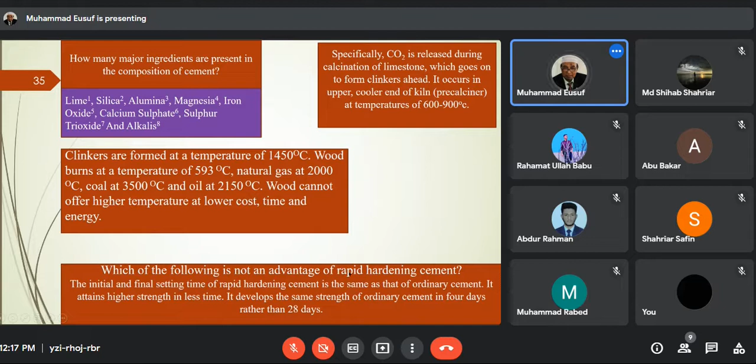This is the composition, and this one is the tricalcium silicate. Tricalcium silicate is one of the Portland cement compounds, its abbreviation C3S. How can we calculate the amount of C3S? 50.7. Then C2S, similarly with this formula, is 22.5. Then C3A, tricalcium aluminate, is 8.6. Then this one, tetracalcium aluminoferrite, is this.

This is a number. This number is the formula, and this value you get from here. This is the free lime. Okay. And properties of cement, again, most important to know. This is the cement properties. Okay, physical properties, chemical properties.

For this class examination, we may ask you the question: what are the main compounds of Portland cement, and how can we calculate this? If this is given, no need to memorize. In the question this equation is given, but this one is not given. So remember this one at least. Okay. And this is important.

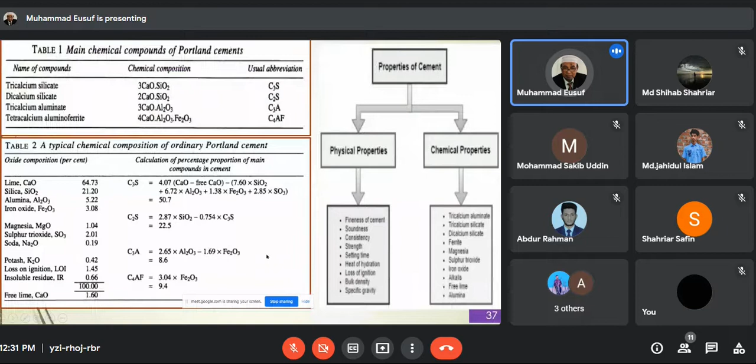Actually, these properties are very general. And this composition is Portland cement. Actually, all are Portland cement. Historically, we said Portland cement, right? Different types of Portland cement are the types of cement. This Portland cement is used in our country, and in construction work we use Portland cement. Other types of cement are very seldom used in our country.

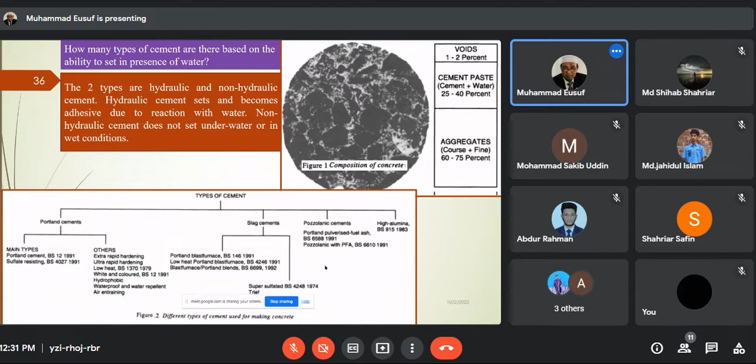These are the main properties of different cement, right? So no need to highly memorize. Just know it. Once you need it, check with this reference. Most important part now: cement is one of the most important ingredients of concrete preparation. The function of cement is to bind all other ingredients and combine them together.

Without water, cement cannot work. Once cement reacts with water, it gains strength for binding, and that binding means adhesive characteristic. There are two types of characteristics.

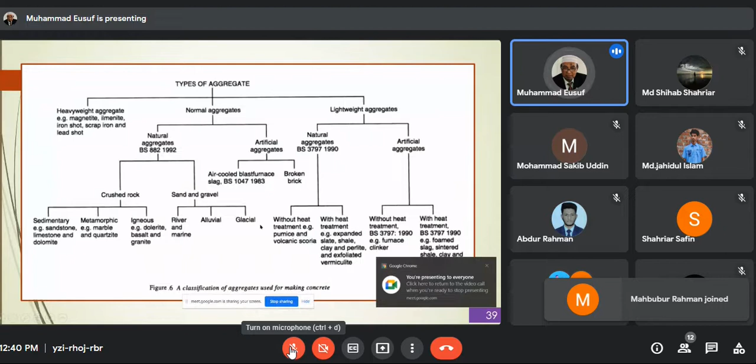La ilaha illallah Muhammad Rasul. Ashhadu anna Muhammad Rasulullah. La hawla wa la quwwata illa billah.

two seasons we cannot work in our country. It is called lean season. Lean, spelling L-E-A-N, lean season of Bangladesh: summer and rainy. This time we make plans, programs, all kinds of managerial jobs. Then we start our work just at the end of the autumn or beginning of the late autumn. So this season we work fully.

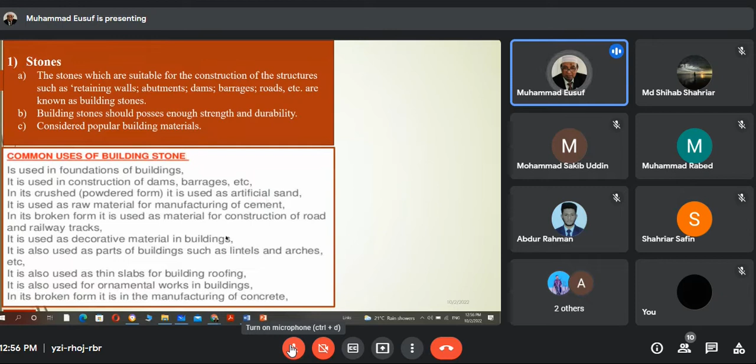Building stone should possess enough strength and durability because it is natural. Enough strength and very durable, long time. It is considered a popular building material. Stone is very popular nowadays in building materials. From the stone we make tiles: floor tiles, wall tiles, toilet tiles. Common uses of building stone. Very carefully study this; this type of question comes in the exam, right? Common uses. You read it, I hope you can understand it.

Okay, now look at hardness. Hardness of stone: qualities and resistance to cutting and resistance to abrasion, scratching. Used in roads and railway tracks. Okay, railway tracks. We use the stone in the railway tracks; its name is ballast. Hardness tests are conducted in the laboratories.

Okay, then durability. This is the ability of stone to resist the atmospheric and other external effects. It depends on the chemical composition and physical structure. Physical structure means what the outlook is, resistance to weathering effects. Weathering means heat, humidity, and wind, and the place where it is used. Stone which contains silicates will be durable. Then those stones which contain a calcareous substance.

Porosity and absorption. Stone can hold water in two ways, either through porosity or absorption. For building purposes, the better stones are those which are less porous because they will absorb less moisture. Porous stones are damaged easily. Porous, sidrojukta, right? Perforated stones are damaged easily. Decomposition: gases and acid in rainwater, acid rain.

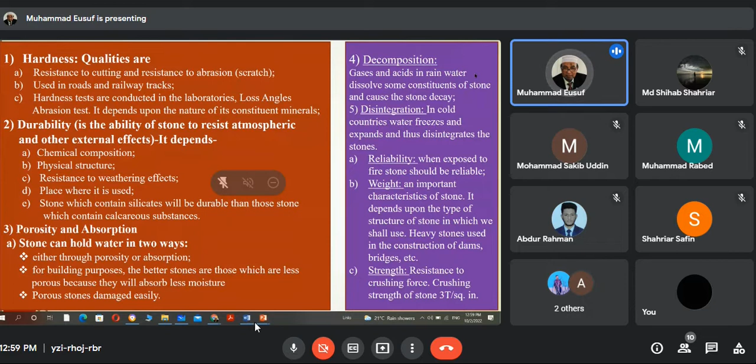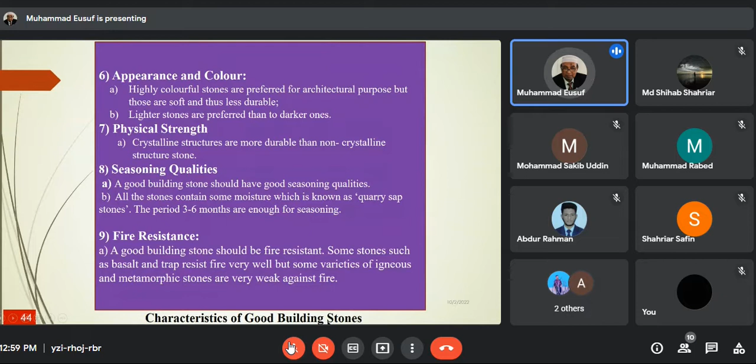And how can we ensure that? Ensure the acid rain: look at the roof of the house, especially a tin shed house. Then reliability, weight and strength, appearance and color, physical strength, seasoning qualities, fire resistance. These are all characteristics of good building stones. Any question you can ask me, or we proceed?

Okay. Stone masonry, like brick masonry. As coarse aggregate in CC and RCC. CC means cement concrete. RCC means reinforced cement concrete. Crushed form of rock is used as roofing material in the form of slates. We use the stone as roofing materials. How can we use the stone as roofing materials? Answer: we make it in slate form, as a flag or thin slab for pavement.

Pave means road surface; pavement, road surface. And wall surface is a vertical surface. Pavement is road. As soling materials in the construction of highways and runways. Do you know the difference between highways and runways? Highway is a road, you know it. Runway is in the airport.

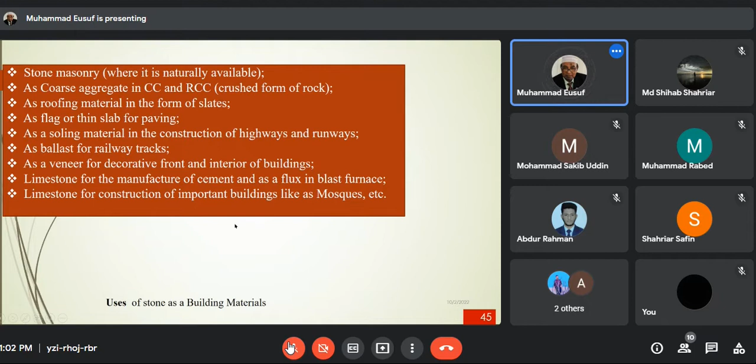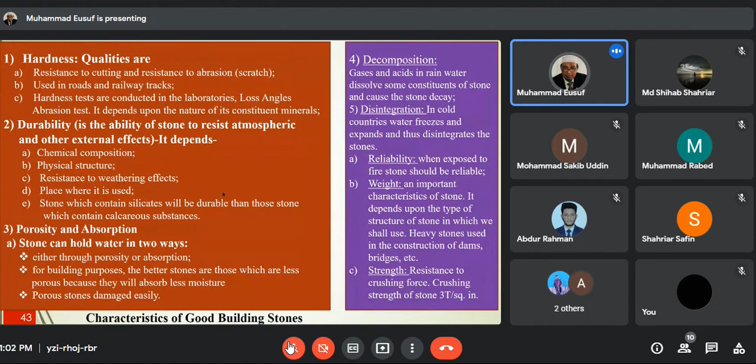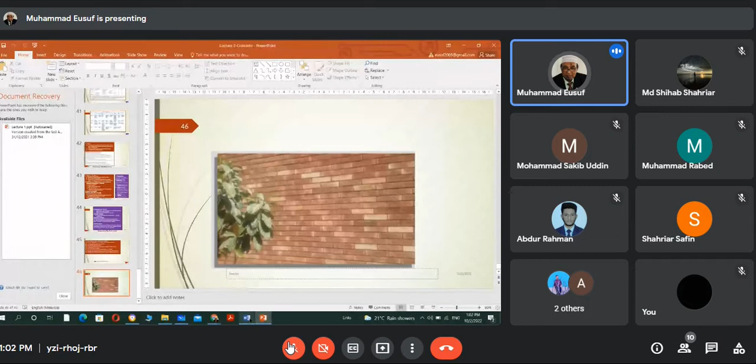Any question? Any question you can ask. And don't worry, read it first. If you do not understand any points, knock me, I will explain it to you. But it is very important for the examination. So this way we finish our concrete presentation. Now we need to look at this one.

In concrete, the most important part is concrete production. First the definition, and then the stages of concrete production: batching or measurement of material, mixing, transporting, placing, compacting, curing, and finishing. Don't forget it. Can you remember it? Brother, can you hear me? Yes, sir. First, the batching.

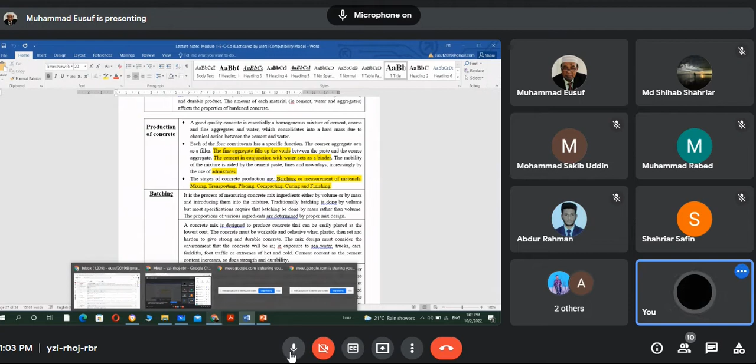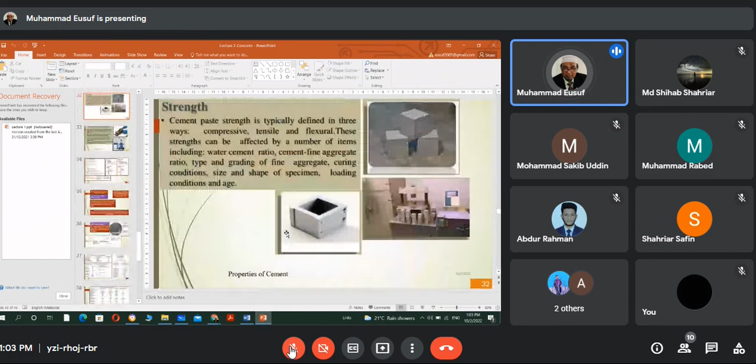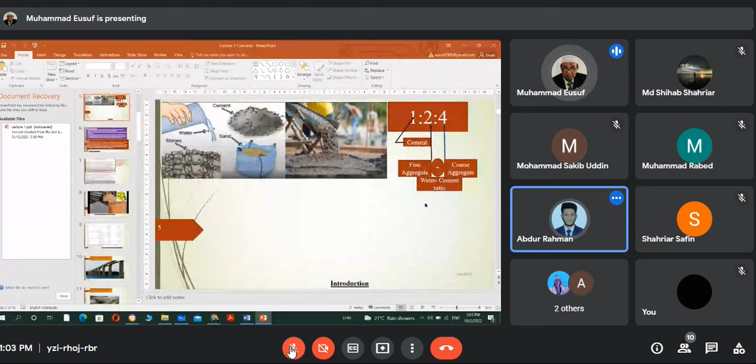Batching means you measure the materials, right? Measurement is based on the ratio. In one class of this presentation I showed you how to maintain the ratio. Look at the ratio very quickly. Where is the ratio? 1:2:4. Look at this. This is the ratio.

1:2:4 ratio. 1 is cement, 2 is fine aggregate, 4 is the coarse aggregate, plus water, okay? The concrete preparation. One bag of cement contains 50 kg. 2 fine aggregate means 100 kg. 4 coarse aggregate means 200 kg. And water, it depends on the cement, or we call water cement ratio.

And normally standard water cement ratio is 0.55, and it is fully recommended by BNBC, Bangladesh National Building Code, or like other building codes in the world, say BS code. BS code is British Standard Code. Okay, many countries follow the British code. Then IS code, Indian Standard Code.

Right. Because concrete preparation depends on the weather, right? All countries' weather is not same. Some countries have very high wind, বাতাস অনেক বেশি হয়, যেমন Los Angeles, their wind blowing is very high. It is close to the coastal area, same as in our country. In Bangladesh, Chittagong, you see the Patenga, high wind there, so their construction is not easy.

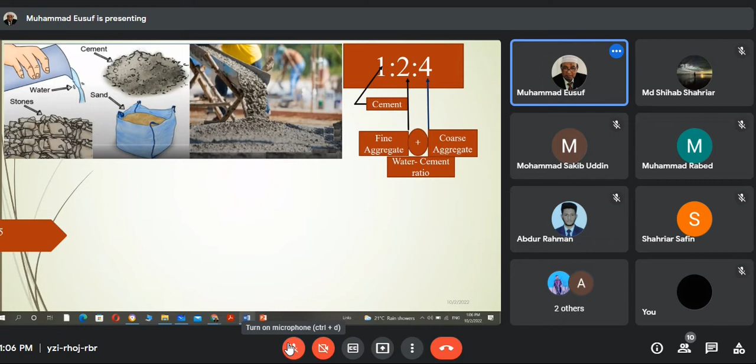In our country, latest one is BNBC 2020. That one we follow yet. Okay, still we follow the BNBC 2020. There you can find out the water cement ratio for the construction, and all other ratios also you can find there, right? Okay. Then batching, this is the measurement.

Say 1:2:4. One bag of cement, 50 kg. Okay, then 2 is fine aggregate. Okay, sand or gravel, that is 100 kg. Coarse aggregate, stone crush or artificially brick crush or broken brick, that we use as a coarse aggregate. That is 4 times of cement in 1:2:4, right? So this is the measurement you do.

How can you make this measurement? By using the balance machine. Okay, but in the construction field, normally we compare with the cement. Then mixing. For mixing, most importantly, an experienced person is required. And mixing also we show you in the lab. Transporting, how can you carry it to your place? Placing, how can you place it in your place?

Okay. Then compacting, most important thing, compact. How can you do it? By using the vibrator machine. Then curing, then finishing. So all explanation explained here. This is compaction, curing, and disadvantage of curing. Factors affecting the evaporation of water from concrete. Okay, methods of curing. How normally do we cure concrete?

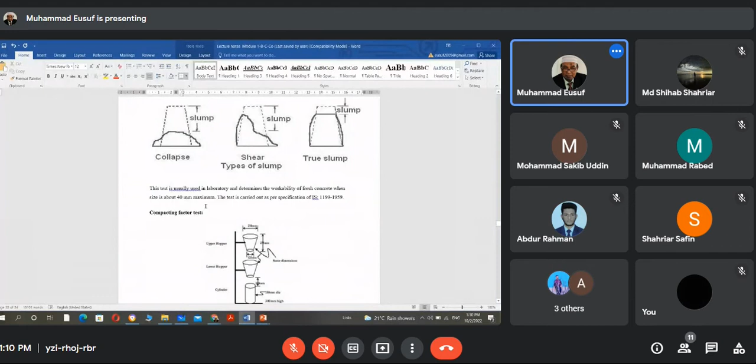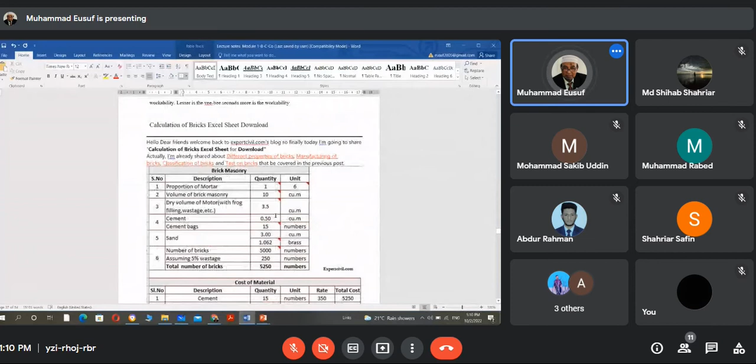This part is for laboratory. Only in the exam they ask you the question, what is slump test? And what are the different types of slump? Okay, then it is for the laboratory. Now come on, calculation of bricks, Excel sheet download. Brick or mortar, brick calculation, right? Now come on, this concrete. I try to explain this sheet.

Concrete grade is M5. M means mix ratio. M for mix. Grade mix ratio is 1 is to 5 is to 10. 1 is cement, 5 is sand, 10 is coarse aggregates. And strength is compressive strength, 5 MPa. M for mega, Pascal, megapascal. We convert it to the US customary system, PSI, pound per square inch. So 5 MPa equals 725 PSI. Similarly, all other things.

Now, question: what is concrete mix ratio? The concrete mix ratio is the ratio of concrete ingredients, cement, fine aggregate, coarse aggregate, and water. These mixing ratios are decided on the basis of the type of construction and the mix design of the materials. Most important last two words. Construction টাইপের উপরে ডিপেন্ড করে এই রেশিওগুলি বের করা হয়, or mix ratio.

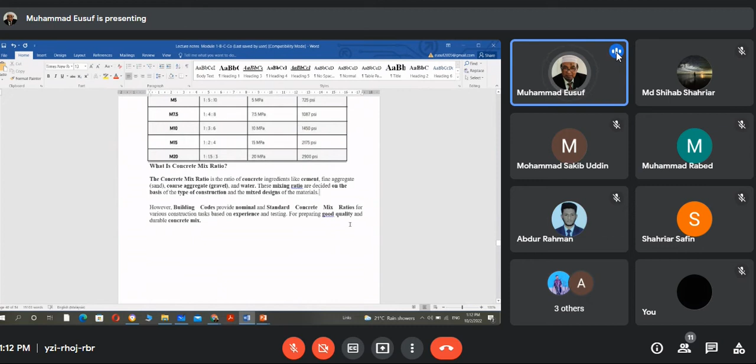However, building codes provide nominal and standard concrete mix ratios for various tasks based on experience and testing for preparing good quality and durable concrete mix. Okay, concrete recipe.

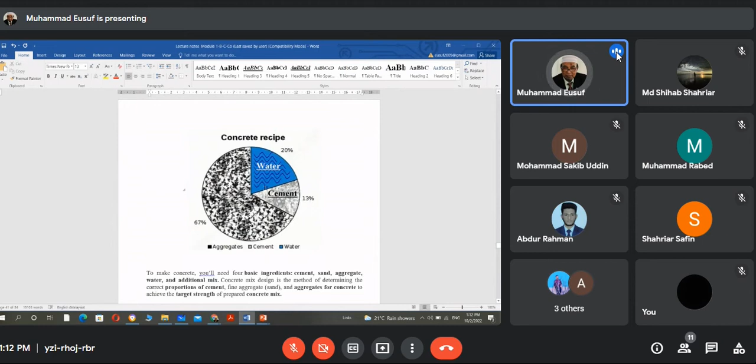67% is aggregates, fine and coarse. Fine and coarse aggregates 67%. Cement is 13%. Rest 20% is water. It is a generalized form. Okay. Different concrete mix ratio. Nominal mix and design mix.

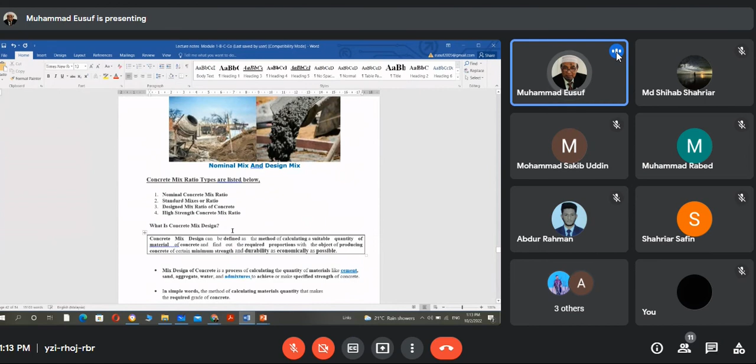This is nominal mix. It is design mix. We make it in the plant, other place of the construction site. This is in situ. That means in the construction site, we make the nominal mix process. Okay. Concrete mix ratio types are listed: nominal, standard, design, and high strength. These four types. What is concrete mix design?

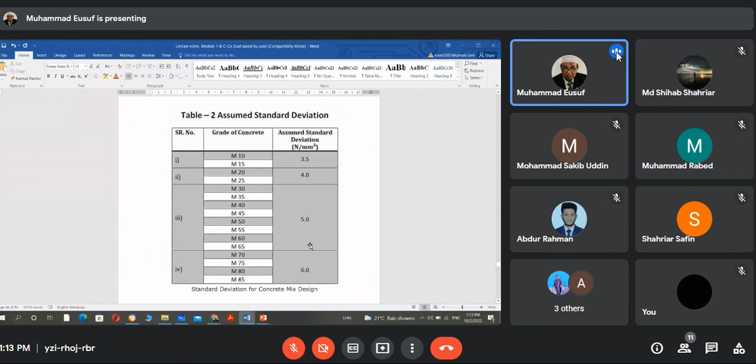Please look through this, because it is very important for the exam. So, concrete mix design. Okay, I just show you a chart today. Just a chart. Here you see grade of concrete and standard deviation. This is standard deviation. We look through the chart, concrete mix chart.

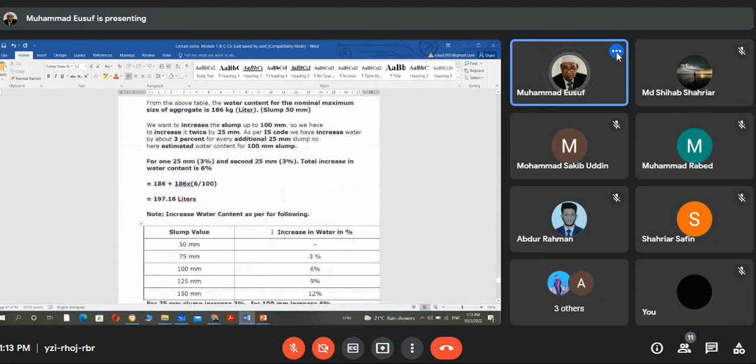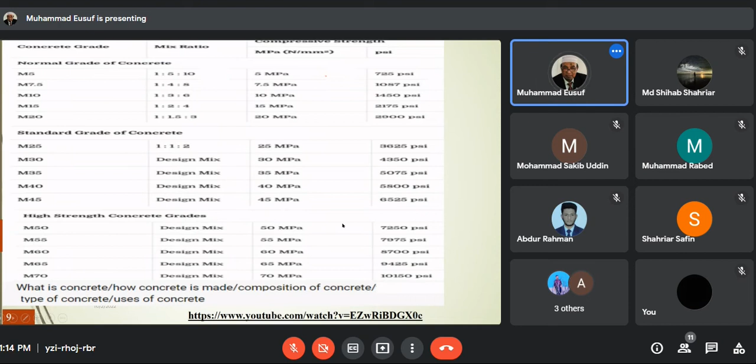Okay, I think it is. Okay, look at concrete M5 normal grade of concrete. M5 to M20. The ratio is like this. The standard grade of concrete M25 to 45. On design mix, we make it by ourselves. High strength. Okay. So next is we calculate. We do some calculation. Here, look.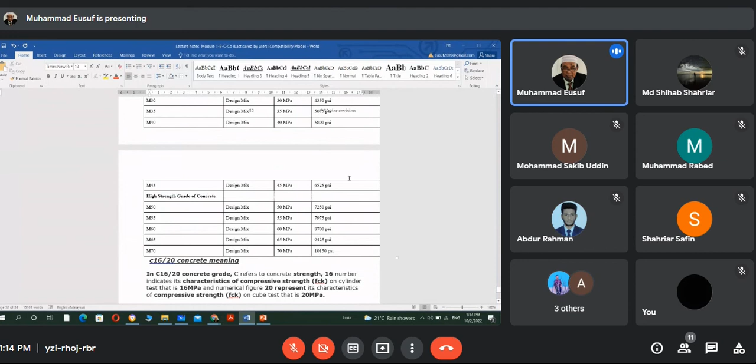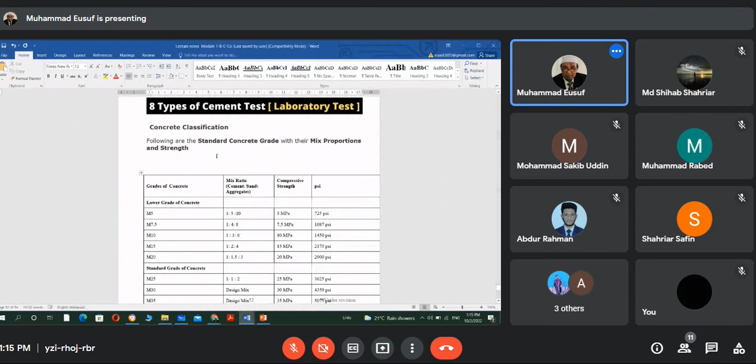Okay. Any question? Finish our class here. Okay. Concrete mainly depends on the mix ratio. Okay.

100%. You are right. If you mix with water, hydraulic cement always gains the strength in presence of water. And non-hydraulic, it does not create any strength. Actually, most of the cement we use for construction purposes is hydraulic cement. We use hydraulic cement. Is it okay?